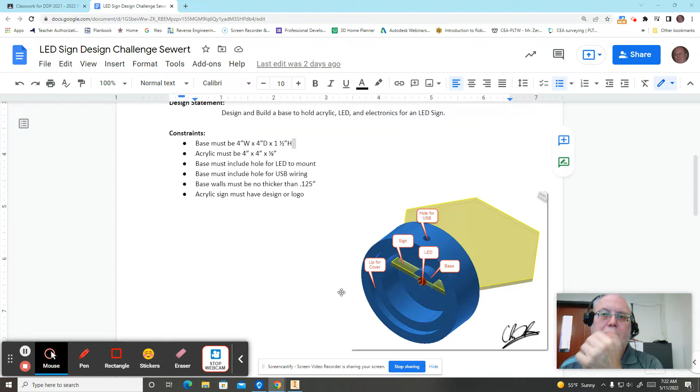Hey everybody, Mr. Sewert here, and today the purpose of this little video is to talk to you about how to go about making this base here. Might make some mistakes, might do some good stuff. We'll see how it goes.

Anyways, here we go. This is the LED sign project, and I'm just gonna backspace a couple things here. And we have to create one of these bases for our LED sign. Now, these are kind of plain. They're not anything other than just basically a hollowed out hockey puck. You can do that if you like, but if you want to give it a little more creativity, a little bit more pizzazz, then what you can do is you can take a look at our design brief here. And it says the base must be 4 inches by 4 inches by 1.5 inches high.

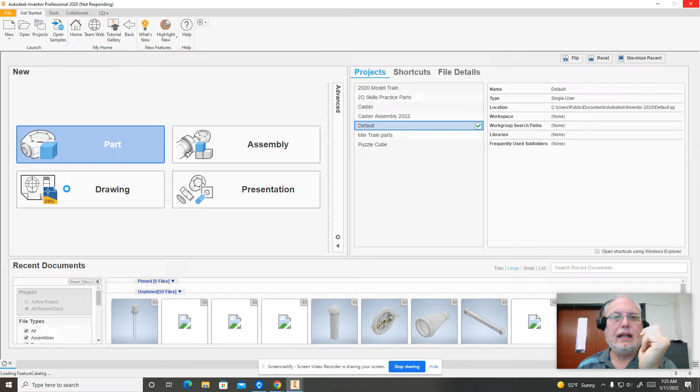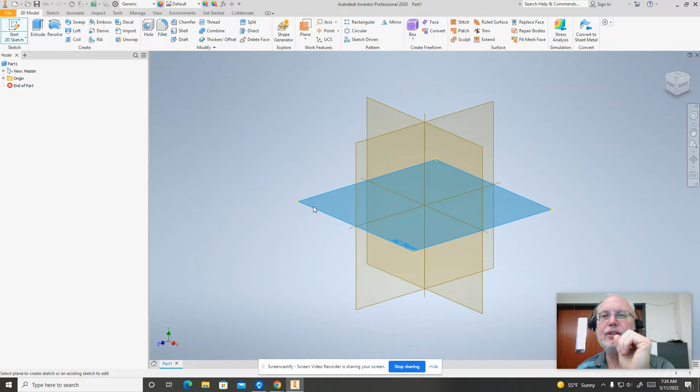So what I'm going to do is I'm going to go to Inventor here, and I've already started my Inventor up, and I'm going to hit Part, and I am going to create our base. And let's see, I want to see something here. Let's go here. Well, all right. Anyways, so we know that our base can only be inside of a 4x4 box that is 1.5 inches tall. So I'm going to start a sketch, and I'm going to put it on this lower plane right here. And rather than doing a circle or a rectangle or whatever, I'm going to do a polygon.

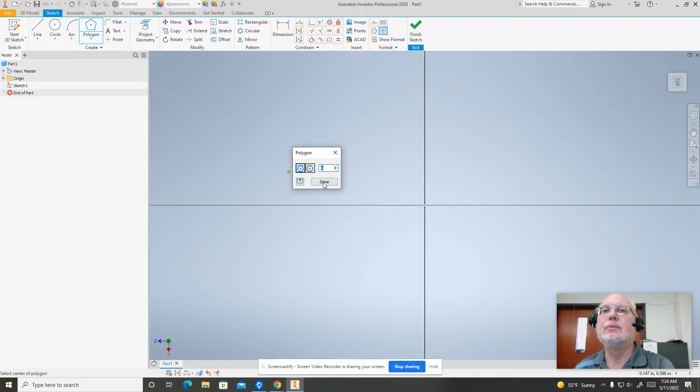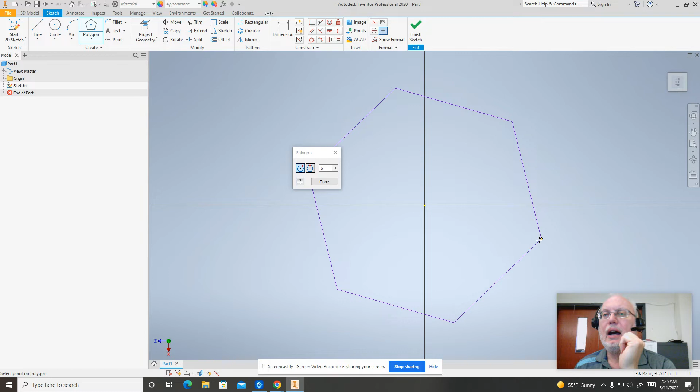And I have two different kinds of polygons here. I have inscribed and circumscribed. I'm going to use the inscribed one, which is the default. We have here the number of facets that the polygon can have. So I want this to have 6. So I'll just come out here and I'll click, and I'm going to pull this out, and I'm actually going to just make that a little crooked, and that's sort of on purpose.

Now, I'm going to go up to my constraints, and I'm going to click on horizontal, and I'll select that line. That didn't come out exactly as I wanted, but I think it'll work. And then I'm going to do a dimension from corner to corner here. I'm going to right click. Come on, you. There we go. And I'm going to say aligned. Good. And I'm going to make this a 4-inch dimension.

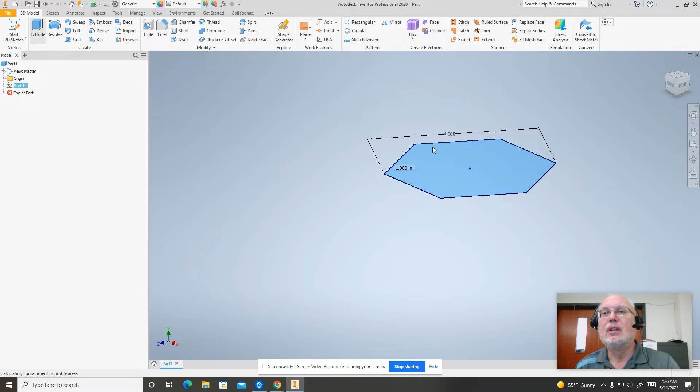All right. So now I have my base created, the bottom of it. I am going to finish the sketch, and I will extrude this up my 1.5 inches. Okay. I'll say okay, of course. And I'll hit the home icon so that I'm looking at this from the isometric view.

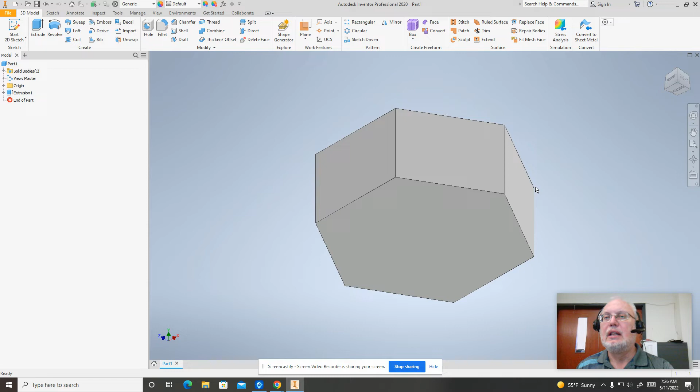Now, what I want to do is I'm going to go to the bottom of this, and you can do the next step a couple different ways. I'm going to suggest that you use the shell command. Now, shell command is right here. And the reason we're doing this is, and I will tell you right now, that the base walls can be no thicker than 1/8 of an inch. So that's an important parameter here.

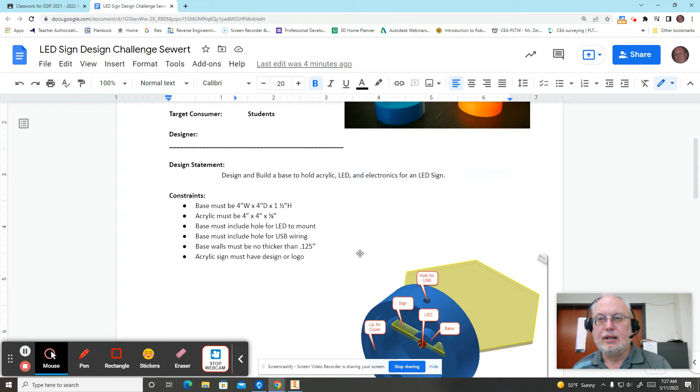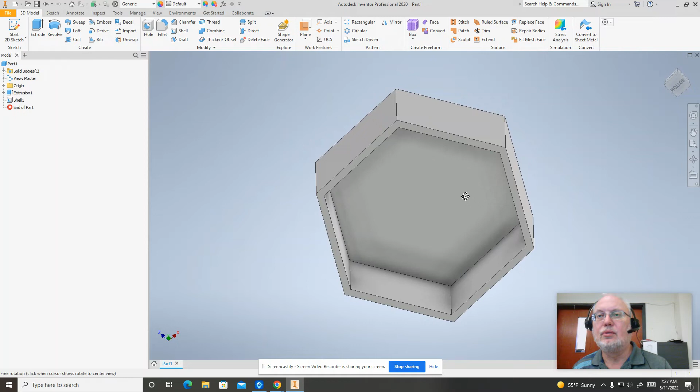So Alt Tab back to this. So remove faces. The thickness is going to be 0.125, which is 1/8 of an inch. I'm going to click on the bottom of this here, and then I'm going to say OK. So that gives me, and I'll rotate this around a little bit here. You can see that now we have a wall thickness here of 1/8 of an inch, and also on the bottom. So back to my home view.

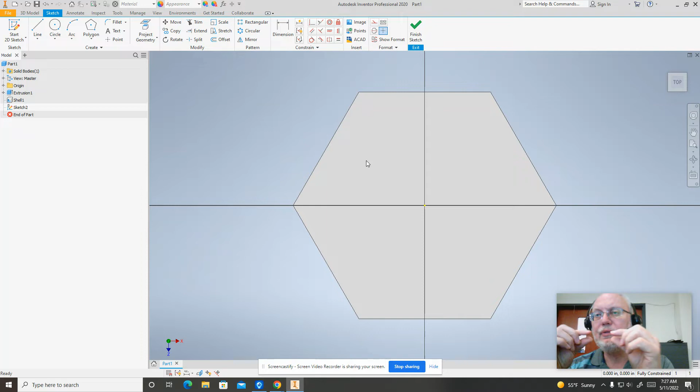Now, what I'm going to do is I'm going to do a sketch. I'm going to put it on this top surface because we have to make a slot in this base so that this thing will hold the sign. So the sign itself is going to be made out of plexiglass that is 1/8 of an inch thick, which is 0.125 inches. And we want to do a nice job with that.

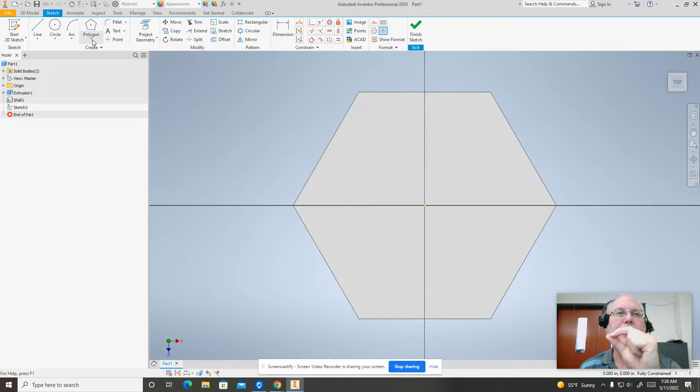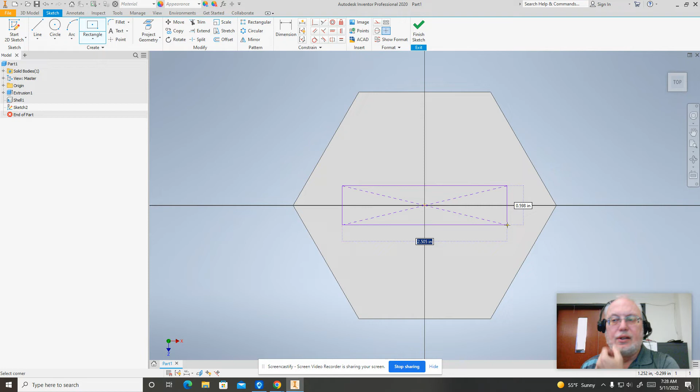So here I'm going to use the 2-point center rectangle. And I'm going to click on the center point of this thing, and I'm just going to pull this out. And I have the blue text right now. So I want this to be 2 inches. And I'll dimension this guy right here, 2. And we're going to make that 0.125. And I can finish my sketch.

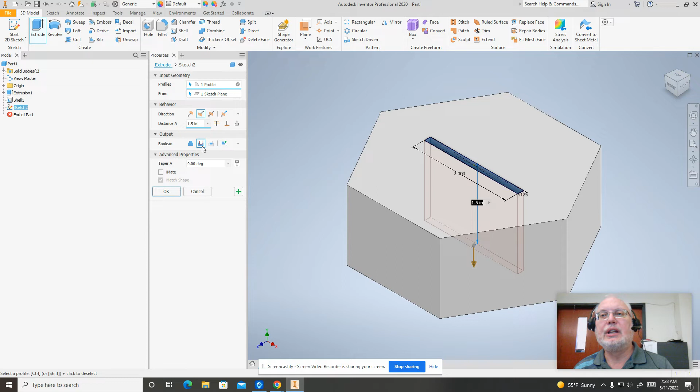And then I'm going to do the extrude. This is going to be a cut. And it's going to go through all. And I'll just say, okay. So now I have a slot in the bottom of this that goes all the way through this part.

Now, back to our little sample here. The next thing is we're going to put an LED into the bottom of this. So the LED has a particular height. I believe it's 0.3 inches. I'm going to pause here for a second and then I'll come back.

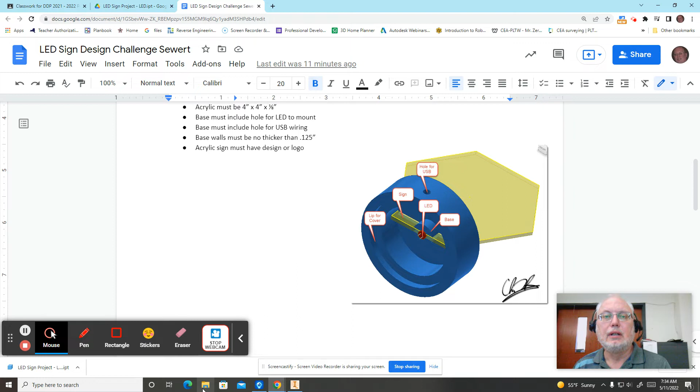Okay, so I just went off and measured my LED. And by the way, just so you know, in the Google Classroom for this assignment, there is a drawn LED already. You're probably going to need this because you're going to need to put this into an assembly drawing later on. So you might want to download this LED .ipt and be able to use that. Okay, so back to our project here.

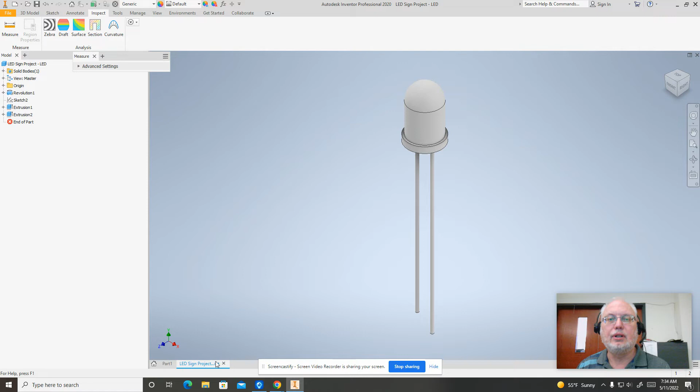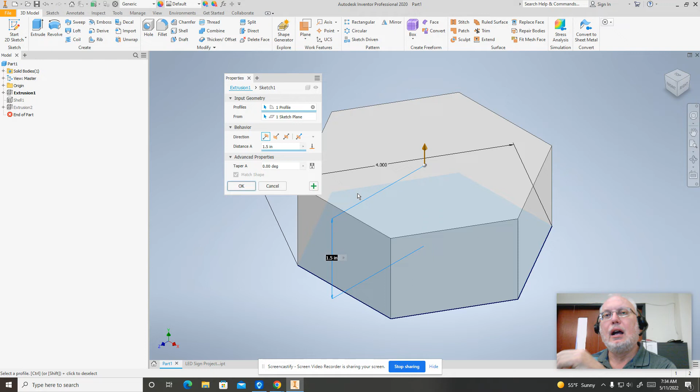Okay, what happened? Here we go. There's our part. You know what? I forgot something. When I did this extrude, and I'm gonna double click this and activate this extrude, I want to put a taper on this. Right now, the sides go straight up and down, but I'd like them to be a little bit angled. So let's change our taper here. I'm going to put a 5-degree taper in, and I'll hit enter.

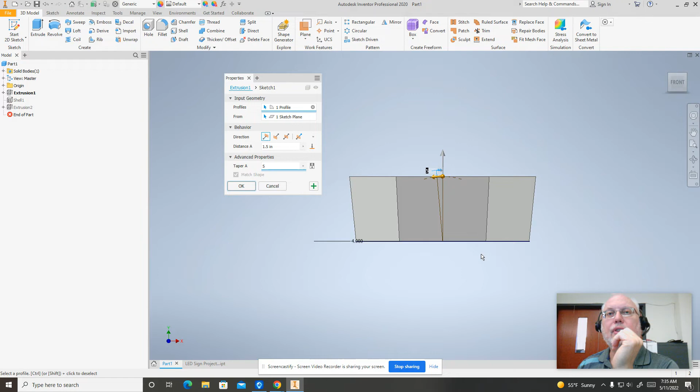And let's look at this from the front. And what you can see is it angles in like this on the sides. But if I want to flip it to go the other direction, I can do that. And I'm just going to say okay. And I'll go back to the isometric. Yeah, that's kind of not too bad.

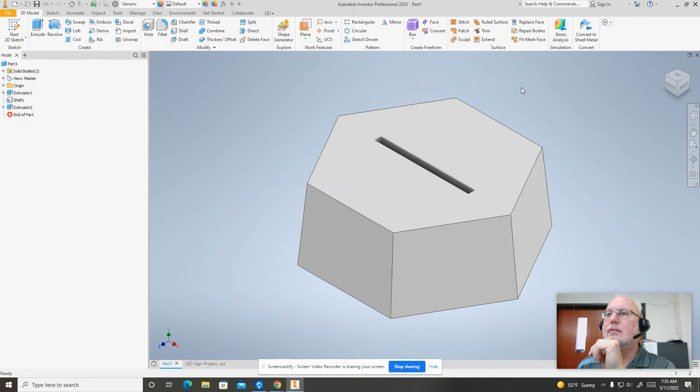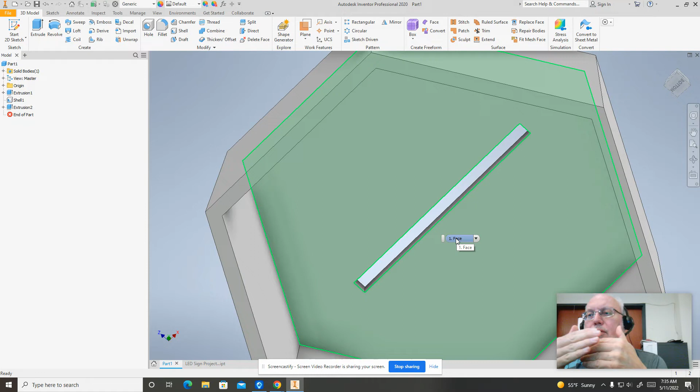All right. Now on to the bottom of our little plate here. So I'm going to flip this to the bottom and shift and hold. And excuse me, I've got to put a little pad on here that is going to allow me to correctly space the LED inside of the tab. That's the word I'm looking for.

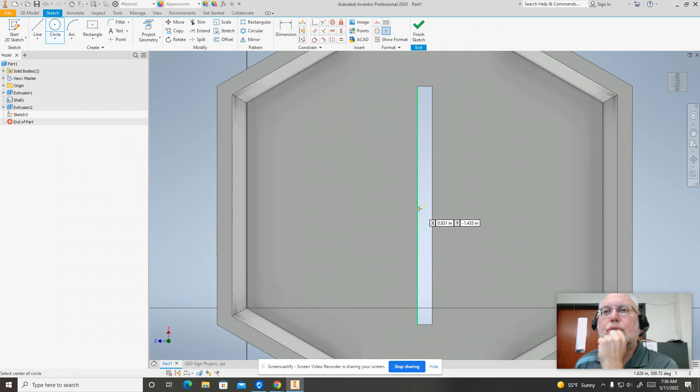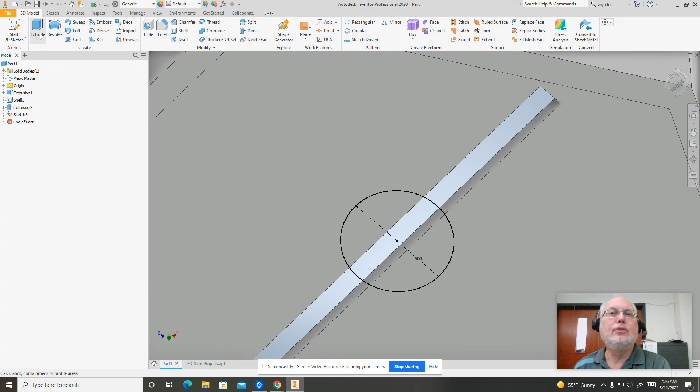So I'm going to start a sketch and I will put it right on that surface there. And I'm just going to use the circle tool here. And I've got a little yellow dot right in the middle of our part. And I want to make this a diameter of 0.5 inches. And I will finish this sketch. Now, I am going to use the extrude tool here. And I just measured my LED, and the LED is 0.33 inches tall.

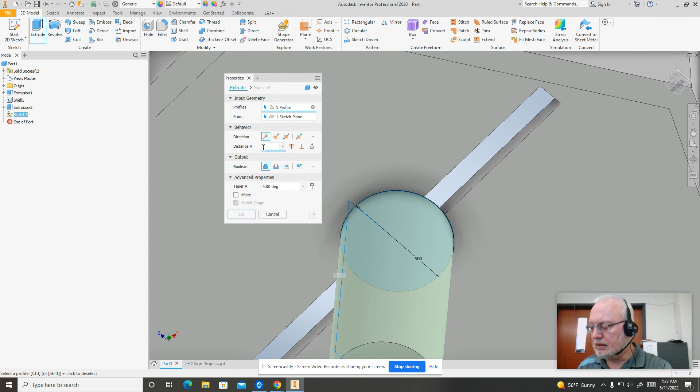And I want the dome of my LED, when I put it into this little contraption that we're working on right now, to just be at the surface of the part here. So the height of this is going to be 0.33, which is the height of the LED, minus the thickness of the base, which is 0.125. So for my distance, I'm going to put in, let's see, 0.33 minus 0.125, and that's going to give me my little boss for the bottom of this part.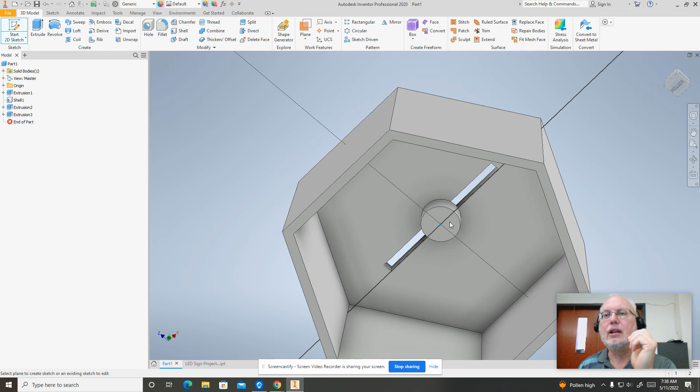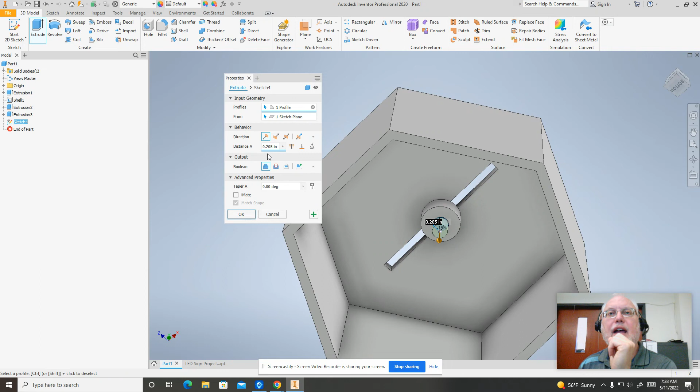Now, I have to put a hole through the center of this little spot, okay? And the diameter of my LED is 0.195. So I'm going to start a sketch. I'm going to go right on that surface. I'll zoom in a little bit here. I'm going to draw a circle from that center point. I'm going to make that 0.195. Enter, finish my sketch. Now this time it's going to be an extrude, and it's already selected that for me, but it's going to be a cut, and the cut is going to go through all, and I'll say okay.

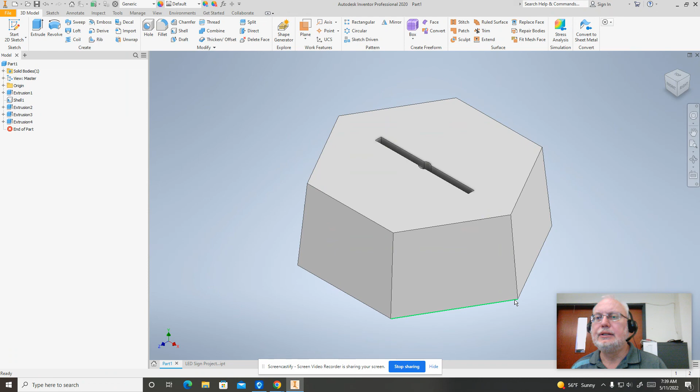So right now I've got my LED holder. That's what this is, this little piece right here. And what I want to do is I'm going to come up to this top surface, and, let's see, what are we going to do here? Oh, I know. Sorry. We're going to put a sketch on the top of here. All right. I'm going to zoom in on this. So you see this gray over here on the right hand side of the hole and on the left? We want that to go away. Now, very simple way to do that.

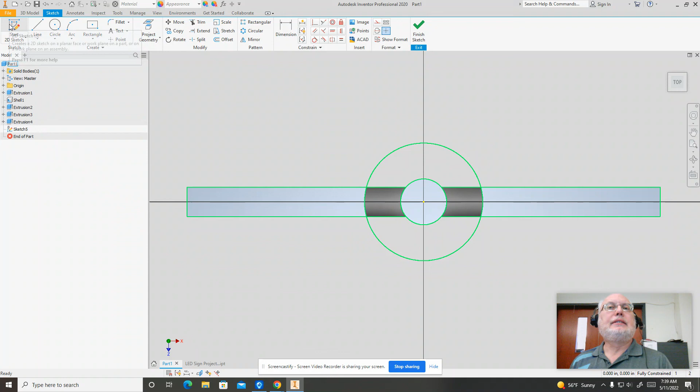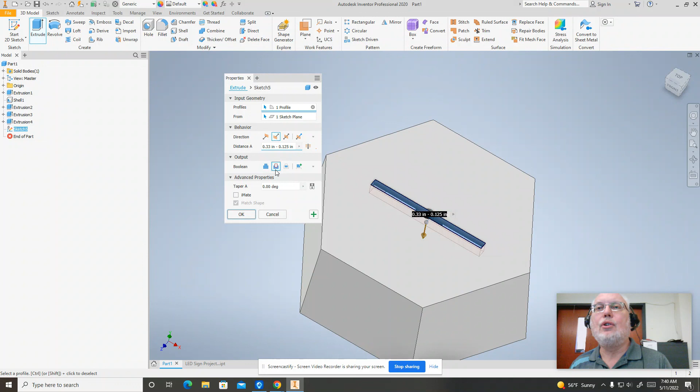So I have put a sketch on the top surface of my base. I'm going to use my rectangle tool, but I'm going to use just a regular 2-point rectangle in this case. I'm going to go out to the edges of my rectangle and draw that, and I will finish that sketch. Then I'm going to do an extrude, and this is also going to be a cut, and it's going to go through all. And then I'll say okay.

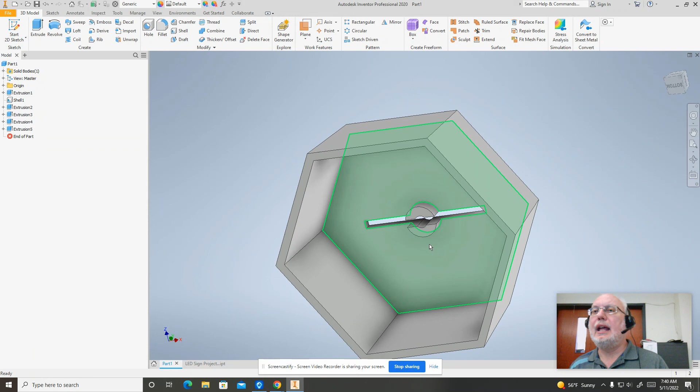Now, if I got this right, and I do, I'll have my little diameter here for putting the LED into and getting it held in place. It'll give us a good gluing surface, I guess is the best way to put it. So that is drawing the base. You can do whatever you like with the base. Any shape you like, as long as it fits in a 4x4 by 1.5 inch tall area.